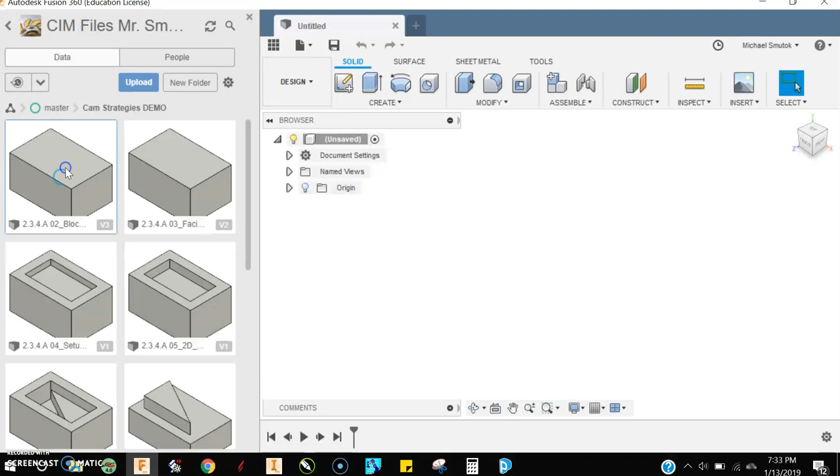I'm going to open this block right here, and the first thing you should notice is that the interface at the top does not look like the one that you used earlier in the year. That is because they have made a change. First thing you're going to do is come over to your name, click Preferences, come over to Preview, and click UI Preview.

The user interface that you know of from before is going to change eventually to this. So we might as well start using it and getting ready for it. All my videos will have this in it now. So that's how you change your computer to match my computer.

So I have this part. It's just a block. It's nothing spectacular. There isn't even a hole cut in it or anything. But that's okay because we can still use this as an example for starting a machine setup. Normally you're using this right here. You're creating something, you're sketching, you're cutting holes in things, you're filleting corners, you're doing all these kind of things. Now it's time to start thinking about having a machine cut this out.

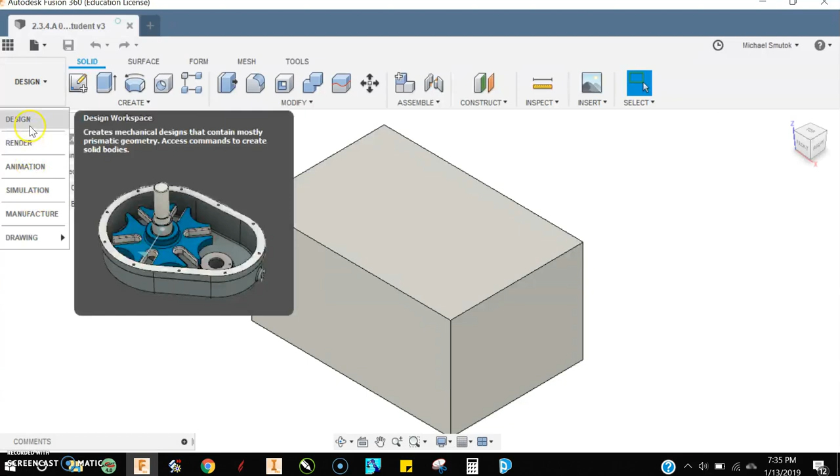So I'm going to come to my design tab, and instead of designing something, I'm going to manufacture. So I'm going to come to manufacture here. You should notice that all the things at the top change, and you may or may not know what those things are yet. That's okay. We're going to go through most of them, not all of them, but most of them we will go through.

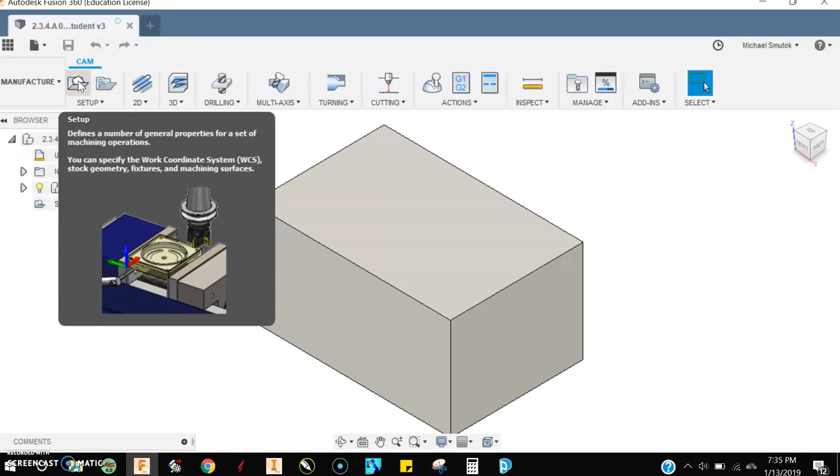Your units, check and make sure that they're in inches, and we'll get ready to go and machine this part. The first thing that you have to do every single time you machine a part is do a setup. And basically what you're doing is you're going to tell the machine where is your 0, 0, 0 on the coordinate system going to be, and how big is your piece of material, and that's basically it for your setup. How big it is and where that 0 point will be on it.

The default is not how you see mine. The default is, I believe, something like this. So when you get this, first thing you're going to do is, I like to work left to right. I go left all the way down, right, and then the next tab all the way down, and the next tab all the way down, and so on and so forth. The different operations have different tabs in their dialog boxes.

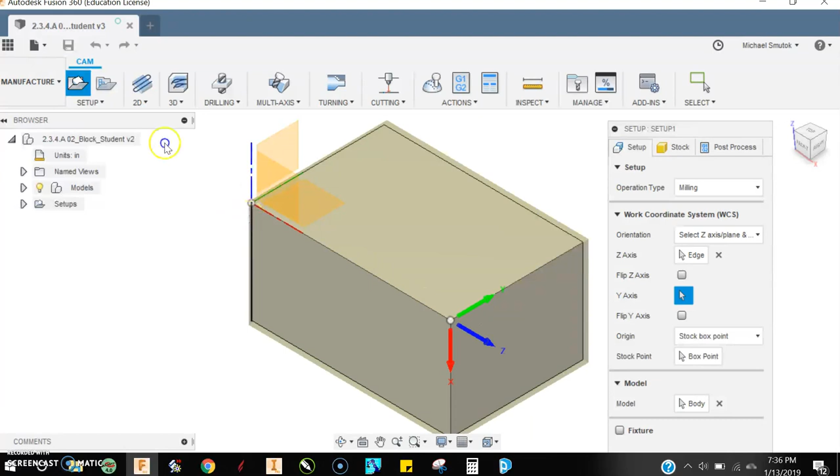So first thing is our work coordinate system. I want to stick it over here in this corner. I'm going to click that, and that's about it. If for some strange reason you need to reselect axes, you can do that. I don't recommend that, but if you needed to, you could do that. I'm just going to go back to model orientation.

Stock. Relative size box is okay. Under stock offset mode, I'm going to come down and click no additional stock. For all of the things that we're going to make in this unit, no additional stock is fine. Here's the size of the block that was modeled.

Post processor. Once you get this how you like it, no additional stock, and your WCS in the corner over here, come over here, right click, and choose make all default. What that'll do is it'll make it so that every time you go and do a new setup, it will automatically choose this corner, and it will no longer add stock to the top and bottom of your box.

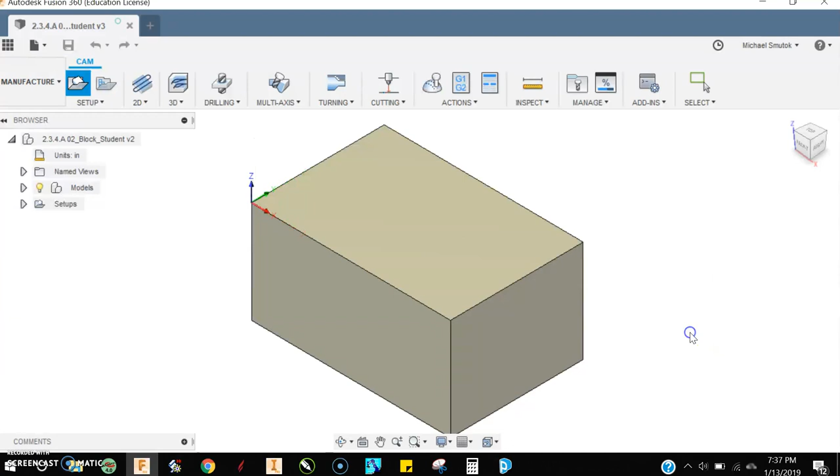So that's it for this video. We have a setup now. So if I went and simulated this, oh, I don't have a toolpath, I can't simulate yet. I'll show you simulation in the next video. Now what I have is a location that my tool is going to be touching off as its 0 point. So that'll end it for now, and I'll pick it up in just a moment, and we'll talk about facing a piece of material.